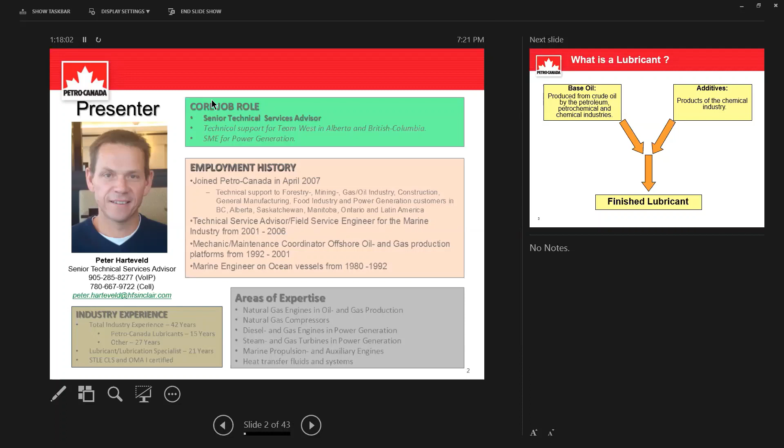So we start at the basics. What is a lubricant? Well, a lubricant is made out of a base oil and additives. We all know that, right?

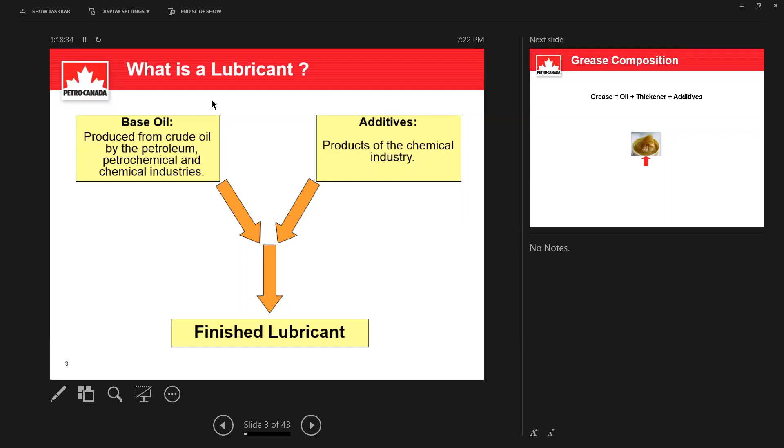Base oils are produced from crude oil by the petroleum industry, and then the petrochemical and chemical industries also produce base oils known as synthetics. The additives are products of the chemical industry, and together they form a finished lubricant.

So it's quite straightforward. In this presentation, I'm going to focus on lube oil, but because grease is also a lubricant, we're going to jump back and forth between lube oils and greases a little bit.

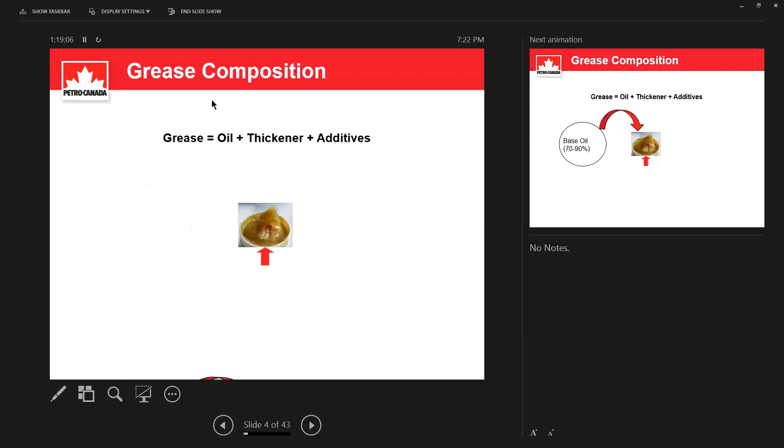So the grease composition actually has three components. In an oil, there is the oil and the additives, but in a grease there is a third one, the thickener, right? And you see that here. There's an amazing amount of base oil in grease, like 70 to 90%, and that's held by the thickener.

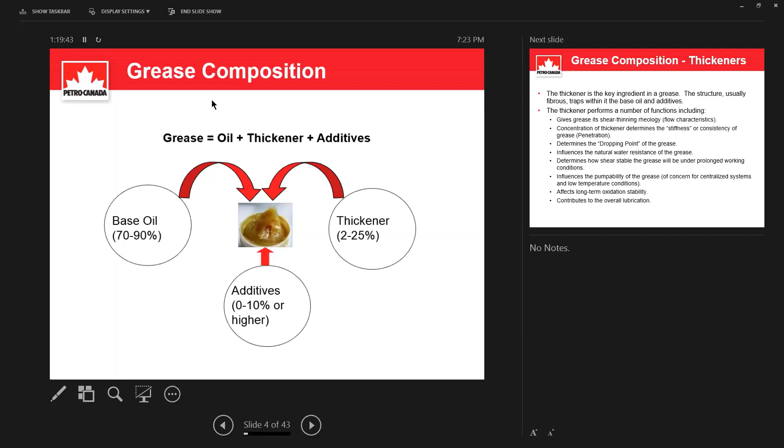You may have heard this comparison where they compare a sponge holding water to a thickener holding the base oil. So there's that much oil in a grease. Then in addition to that, depending on what type of grease it is, there is 2 to 25% thickener. And then there's additives, anywhere from 0 to 10%, depending on what kind of grease it is and what the application is for. So that is how a grease is made up.

To continue a little bit on thickener types and what kind of influence that has on the properties of a grease: the thickener is a key ingredient in a grease. And the structure, as it says here, is usually fibrous, but the fiber structure of thickeners varies. And like I said, it traps within it the base oil and the additives.

The thickener performs a number of functions, including what you see here at these bullet points. It gives the grease its shear thinning rheology, so the flow characteristics of the grease. The concentration of the thickener determines the stiffness, or the penetration, or the consistency of grease, which is measured in a cone penetration test.

It determines the dropping point of the grease. So the dropping point of the grease is a high temperature whereby that grease is no longer capable of resisting it, and then the whole compound falls apart.

The thickener also influences the water resistance of a grease, because certain greases, like calcium-based greases, are more water resistant than others, right?

It determines how shear stable the grease will be under prolonged working conditions, and how, as it thins out in its operation, some greases thin out, and how that returns to its original consistency after the machine is stopped, let's say.

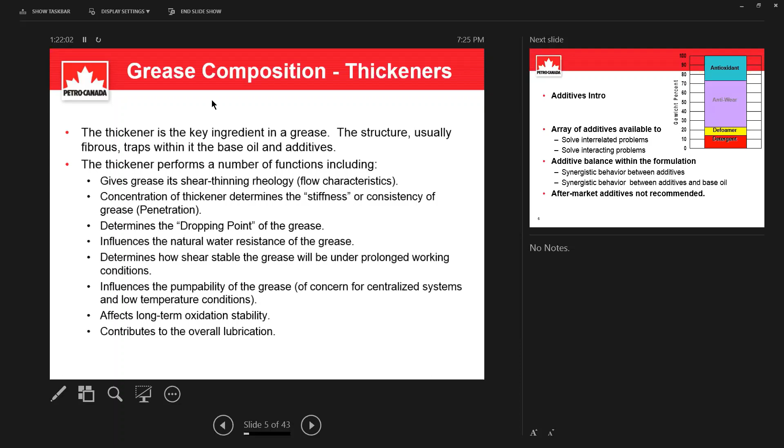Now we go back to additives in general. So there is an array of additives available to formulators, many different kinds. And these types are available because over time they've been developed to solve interrelated problems.

So interrelated problems means problems between the additives themselves—one product or one additive kind of hindering the performance of another additive. And they've also been developed to solve interacting problems between the base oil and the additive.

And that is known as a balance within the formulation. So the formulators strive to design a recipe, if you will, which is very balanced. And then they talk about synergistic behavior between the additives—so the additives should not fight with each other, they have to support each other—and a synergistic behavior between the base oil and the additives.

That balance within the formulation is the main reason why aftermarket additives are not recommended by us as an oil manufacturer. And I'm not saying that aftermarket additives are not good, because there are some high quality products on the market. But I'll tell you in the next slide why those should not be used.

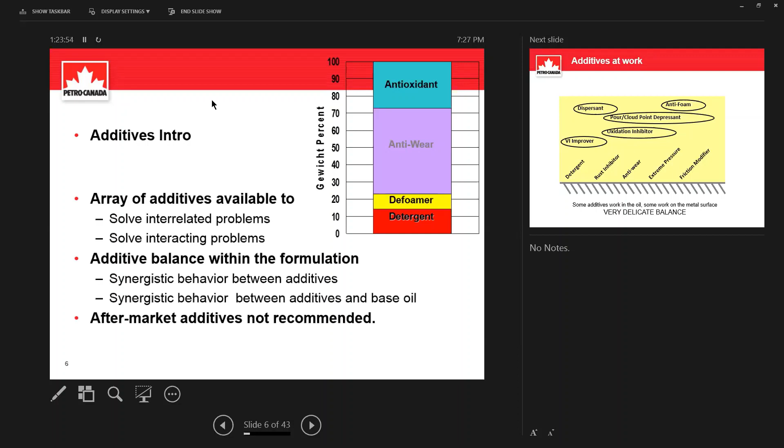Okay, so here, additives at work. This is a depiction of a metal surface inside a piece of equipment, can be anything, and a lube oil film. Within that system, some additives work in the oil and some additives work on the metal surface, so they are surface active. You see the examples of that over here.

Now we're going into the separate ones in the next couple of slides, really in detail. But I wanted to use this slide to explain to you why aftermarket additives are not recommended. Let's say that somebody buys an anti-wear additive compound to add to their finished lube oil formulation.

That will improve the wear protection of the product. However, if you put too much anti-wear in there, there will no longer be place on the metal surface for, for instance, a detergent. And if we talk about an engine, then the engine can become really dirty inside, because now the detergent doesn't work anymore. This is sort of a simplification of explaining it, but it's all related to the polarity of the molecules that try to find a place on the metal surface.

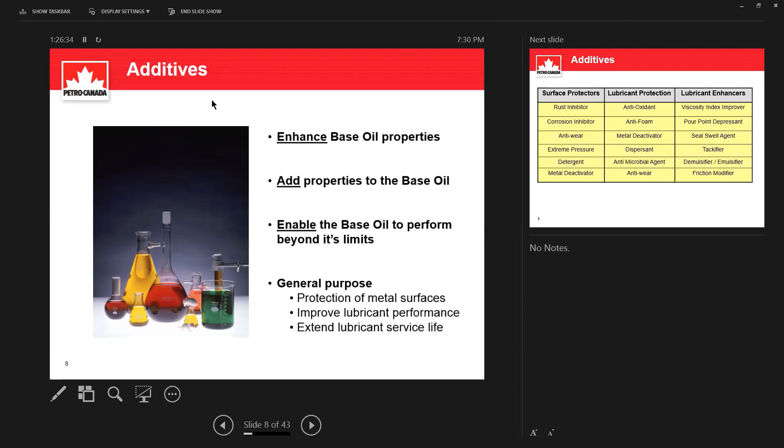Here is a table that shows an overview of the additives as they are categorized in surface protectors, lubricant protectors, and lubricant enhancers. We will go into most of these in detail during the presentation. I just wanted to pick out some that we probably see the most.

Like a detergent in an engine oil is there to maintain cleanliness, but also to neutralize acids that are formed during combustion. That is surface active, but it always works hand in hand with the dispersant. We'll come to that later.

The anti-wear, as the word says, is there to protect equipment from wear. But you can see that it's also a lubricant protector, because the anti-wear also acts as an antioxidant.

And then there are lubricant enhancers like viscosity index improvers. Those are molecules that are used to make a multi-grade oil. And tackifier is an additive that is used a lot in grease, and the word kind of speaks for itself. It makes that grease more tacky, sticky, adheres to metal surfaces better that way, makes it more resistant to water wash out, water spray off, that kind of thing.

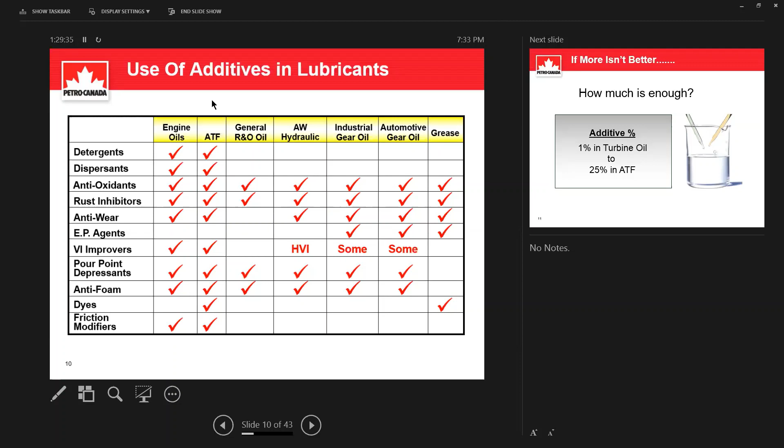Like a general R&O oil, a turbine oil, should have the least amount of additives as possible because it prevents formation of sludge in an operating turbine. So that's one example of that. So if more isn't better, how much is enough? 1% additive treat rate in a turbine oil and 25% in an ATF. You see how widespread that is, right? And it's done for a reason.

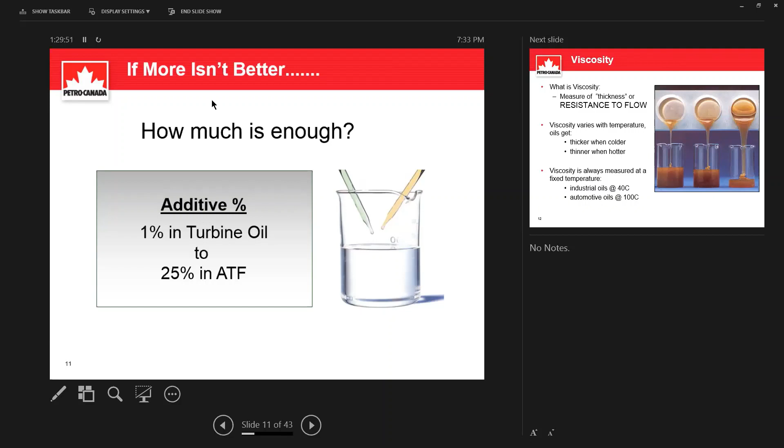Now let's talk for a minute about viscosity. We all know viscosity sitting here, that's kind of very basic. So viscosity is the most important property of a lube oil. And what is it? Measurement of thickness or resistance to flow.

You all know that viscosity gets thicker when the oil cools down and gets thinner when it gets hotter. But the reason I say this is because now we're going to have a look at viscosity index improvers, and how they influence viscosity in relation to temperature, and with that, how a multigrade oil is formulated.

Viscosity is always measured at a certain temperature. So for industrial oils at 40 degrees C - you probably all know that, like ISO VG 32, ISO VG 46, those are 32 and 46 centistokes at 40 degrees C, right? But if we look at automotive engine oils, according to SAE, they are specified at 100 degrees C. That's something to keep in mind when we go through the next slides.

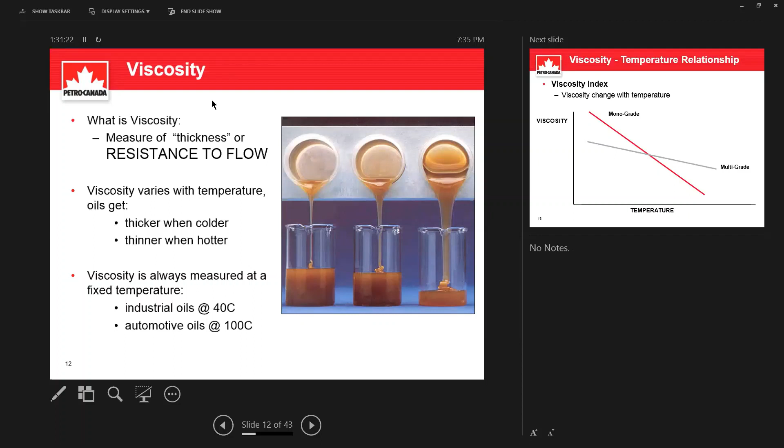Viscosity index. Here on this graph, we show the viscosity-temperature relationship between a monograde oil, which is the red line, and a multigrade oil, which is the gray line. It shows the viscosity change with temperature.

As you can see, when looking at the monograde oil, as it cools down, it starts to get really thick. But when it heats up, it becomes really thin. And that is not something that is desirable, because you want to have a viscosity-temperature relation that is quite flat, to give that particular oil a wider operating temperature range.

And that is what the multigrade oil does, because it becomes clear here from this graph that as it cools down, the viscosity is lower, and as it warms up, it doesn't thin out as much, right? You've got to keep in mind that the viscosity is directly related to the lube oil film thickness inside a bearing or between a piston ring and a liner. And that is why we want to keep this from dropping too much, because then the lube oil film becomes too thin and metal to metal contact starts.

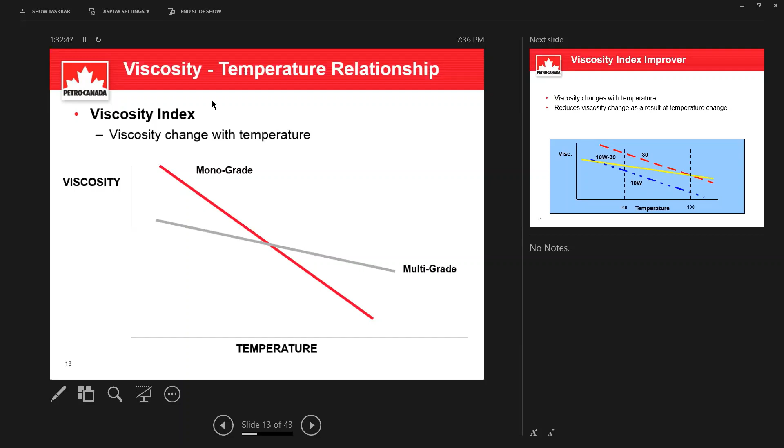Now, taking it to a little bit more of a specific level, let's have a look at a 10W30 engine oil. We already know that the viscosity changes with temperature, and the function of the viscosity index improver is to reduce the change in viscosity as a result of the temperature change. This 10W30 oil is made up of a 10W base oil with added VI improver, or viscosity index improvers.

As I said before, we're looking at an engine oil, so the viscosity is specified at 100 degrees C according to SAE. So this 10W30 oil, multigrade, is an SAE30 oil, right? But it's a multigrade, it's not a monograde. So being an SAE30, it has to have the same viscosity as the monograde SAE30 at 100 degrees C. And as you can see, it does.

So it's a 30. But if we go to the low temperature side of the graph here, you'll see that it doesn't thicken up as much as the SAE30 does. It stays thinner, which is good for low temperature startup, because if the oil is too thick, it takes some time for it to be pumped to the top of the engine to lubricate the camshafts or valve followers or whatever is there. And so the 10W30 is better at doing that.

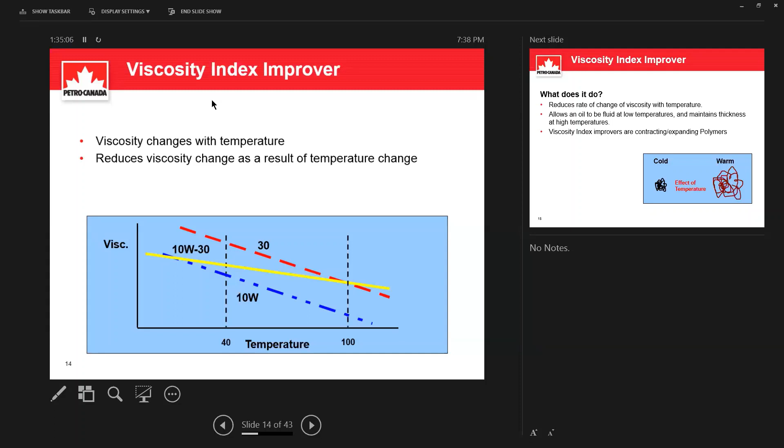So viscosity index improvers are molecules that are designed to reduce the rate of change of viscosity with temperature. So they allow an oil to be fluid at low temperatures and maintain thickness at high temperatures. They are molecules that have the ability to contract and expand, as you can see on this picture here. So when it's cold, they sort of ball up into a very small size. And when it's warm, they expand and become bigger.

The size of a molecule directly influences the viscosity of an oil. So by doing this, going from here to there or vice versa, it reduces the change of viscosity with a change in temperature. Is that kind of clear the way I explained it? So that's what it does.

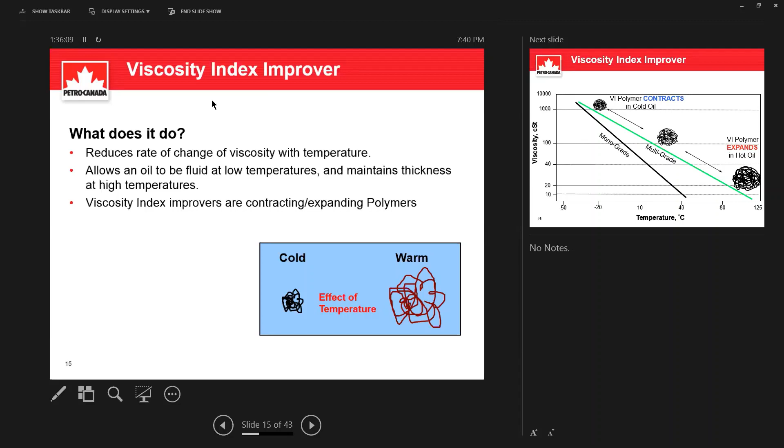And here you can see that depicted in another way. So the VI improver is a polymer. It contracts when it's cold, so by doing that it doesn't thicken up as much as the monograde. And when it heats up, it expands and it doesn't thin out as much as the monograde. So that's how that works.

Now, earlier on before dinner, some of us enjoyed a beverage. So my question to you is, how would that work with beer? I usually ask about water, but here we can talk about beer. So how do you think that works? If you look at this, how would beer or water react? Any idea?

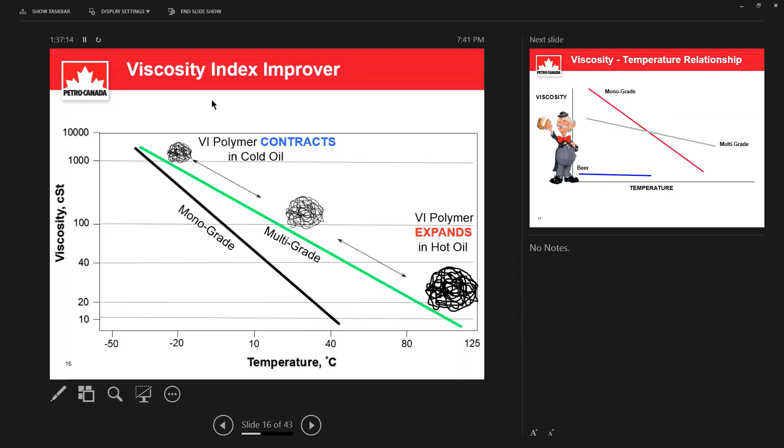No, it doesn't, just by itself. We're not talking about freezing or boiling. We're talking in between. It doesn't change — this is what it is, right? Very low viscosity like water, and it just has a flat line.

When you talk about VI, you look at typical data of lube oils and it's got a certain VI. A fluid like this has an extremely high VI. A fluid like this, with this large change, has a low VI, around 100. And those multi-grade oils have a VI of around 150 — this is kind of an example of what happens here. And there are hydraulic oils on the market that have a VI of around 400, so they have a very small rate of change with a change in temperature.

The taste will change, hey? The taste will change, yeah sure. Yeah, if you put that in, this is not nice anymore.

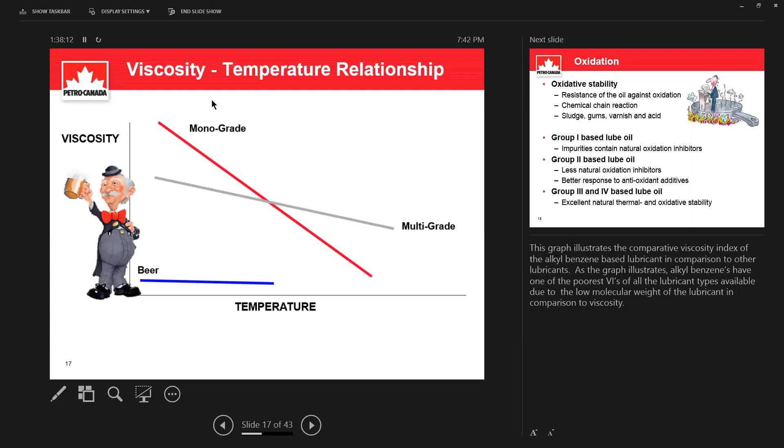All right, so those were viscosity index improvers. And if you have questions, just go ahead — you don't have to wait till the end.

So now we're going to have a look at oil life. Oil life is very often limited by oxidation, and that's why an oil has to have oxidative stability — the resistance of the oil against oxidation. Oxidation is a chemical chain reaction whereby sludge, varnish, gums, and acids are being formed. Viscosity goes up after a while, and it reduces the life of the oil.

Oxidation affects different types of lubricants differently, depending on the group of the base oil. So a Group 1 base oil, just because of the way it is manufactured — the refining process — is only capable of taking out a limited amount of impurities.

You'd say, well, that's negative, and it is, but there's also a positive side, because some of these impurities contain the natural oxidation inhibitors present in a Group 1 base oil. That gives a Group 1 base oil fairly decent oxidative stability, but not as good as a finished lubricant made of a Group 2 base oil. Because of the manufacturing process of a Group 2 base oil, the process is capable of removing more of those impurities. By doing that, it will take out more of those naturally occurring oxidation inhibitors.

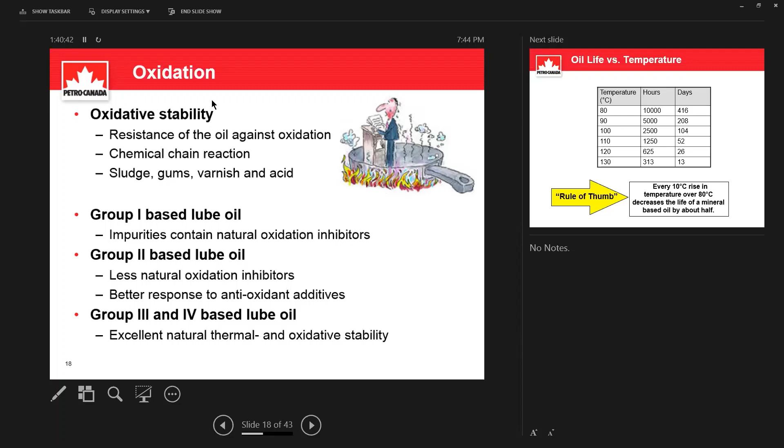There's a rule of thumb often used when we talk about oxidation and how it reduces the life of the oil: every 10 degrees Celsius rise over 80 degrees C, sometimes 70 degrees C is used, will reduce the life of the oil. For a mineral oil — since synthetics can react differently — the life is reduced by about half. So you run a mineral oil at 80 degrees C and it lasts 10,000 hours; that same oil in that same equipment will only last about 5,000 hours if the temperature goes up to 90 degrees C. So that's all part of oxidation, because oxidation is very much influenced by temperature.

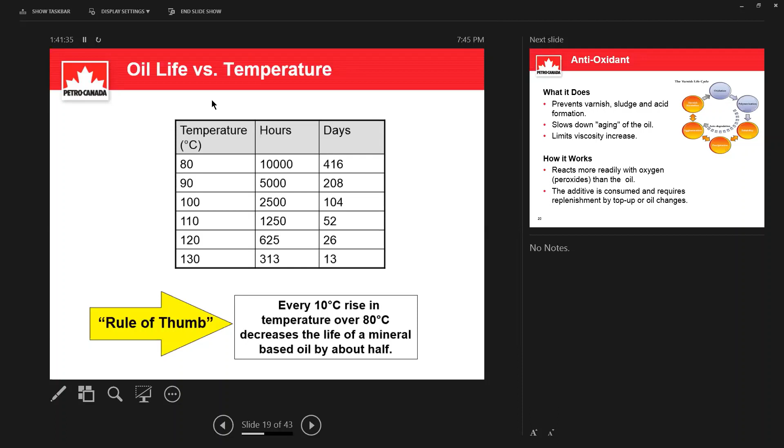So for that reason, formulators add an antioxidant to the base oil. What does it do? It prevents varnish, sludge, and acid formation, and it slows down the aging of the oil.

It limits viscosity increase because over time, oxidation will cause the oil to become thicker, dark, and smelly, but by then it's in a far progressed state. It does that by reacting more readily with oxygen out of the air than the base oil does. There's a chain reaction that involves peroxides, which speed up at an accelerated pace, and once it starts oxidizing, it goes faster and faster.

The antioxidant additive sacrifices itself, so it's consumed, and it requires replenishment by top-up. In large systems we sometimes sweeten, while in smaller systems we do oil changes. In a small system, the oil is at the end of its life, you're not going to sweeten it, you're going to change the oil.

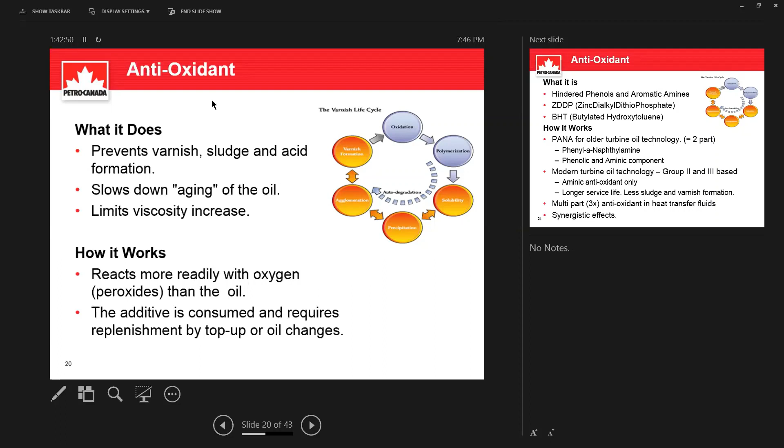Now we're going to the chemical stuff. So there's hindered phenols, aromatic amines, ZDDP, zinc dialkyl dithiophosphate, which is actually an anti-wear additive but also acts as a secondary antioxidant in formulations. Then there is BHT, butylated hydroxytoluene, but I think there are more that I just don't know. An example I'd like to use is something I found recently.

We're talking about turbine oils here. Historically, turbine oils were formulated with a dual antioxidant combination called PANA, a two-part antioxidant. PANA stands for phenyl alpha naphthylamine, and it contains a phenolic and an aminic compound. The nice thing about that is the aminic compound depletes slower because there's a regeneration process within that package, where the phenolic antioxidant regenerates the aminic antioxidant. That has always been thought to be the top of turbine oil formulations, giving that oil a long life.

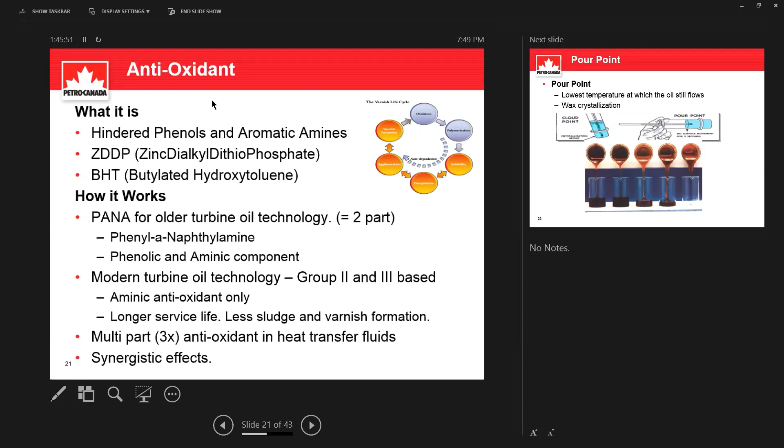Okay, pour point. Very, very important, especially here in northern Canada in the wintertime. We want to make sure we get customers oils that have low temperature fluidity. So then we look at the pour point, which is the lowest temperature at which the oil will still flow. Just before the pour point sets in at a certain temperature, we talk about the cloud point.

You can actually see that because the oil goes from bright and transparent, although it could be an amber type color, to becoming somewhat hazy. Most oils are made with paraffinic base oils, and depending on the production process, they contain a certain amount of paraffinic wax. At low temperatures, that paraffinic wax starts to crystallize, and those crystals grow bigger and start sort of holding each other, forming a web of crystals that eventually turns the oil into a solid.

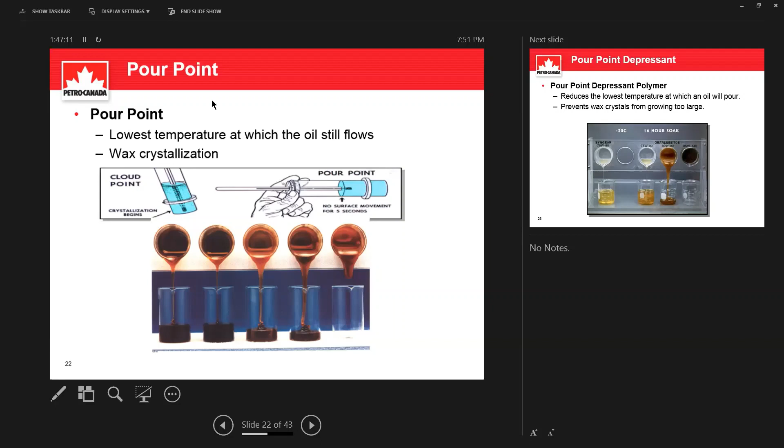So the formulators use a pour point depressant polymer to reduce the lowest temperature at which an oil will pour. That's pour point depressants, often abbreviated as PPD, and what it does is prevent those wax crystals from growing too large. Of course there's a limit to that, but that's how that works.

Now, I guess you all know what PAOs are - group 4 base oils, polyalpha olefins. That's a man-made molecule, still a hydrocarbon, but there's no paraffinic wax in there. That's why those PAO products are often found in products that have very low pour points, like -50, -60.

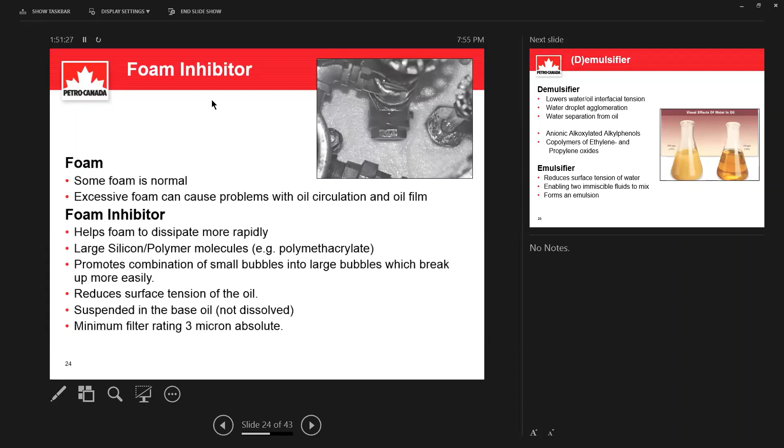The other thing I would like to say about foam is that foam problems are very often confused with air release problems, because air release is something different, but it shows up in kind of the same way as a lot of foam. And so yeah, that's one thing. What was the other thing? That's it, go to the next slide.

Demulsifiers and emulsifiers. So some oils will be formulated to demulsify, which means to readily separate from water, and other oils are formulated to emulsify, so to make an emulsion.

An example of an oil that demulsifies is an industrial gear oil. In an industrial gear oil, we want to make sure that any water that gets in there readily separates from the oil, and then because of the density being higher than that of the oil, the water will sink to the bottom of the gearbox, settle out, and then the end user or the operators and mechanics can drain off that water from the bottom of the gearbox.

So the demulsifier lowers the water-oil interfacial tension, which promotes water droplet agglomeration and water separation from the oil. They are anionic alkoxylated alkylphenols and copolymers of ethylene and propylene oxides.

Now, emulsifiers - that is the opposite. The formulation purposely aims to create an emulsion, and it does that by reducing the surface tension of the water to enable two immiscible fluids to mix. So the water and the oil will then mix to form an emulsion.

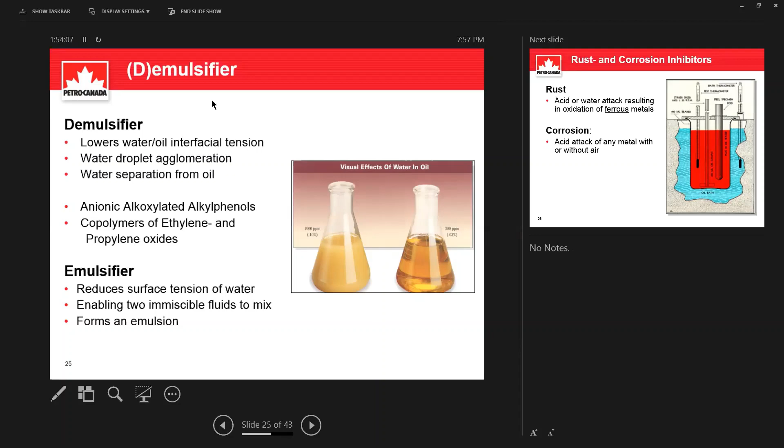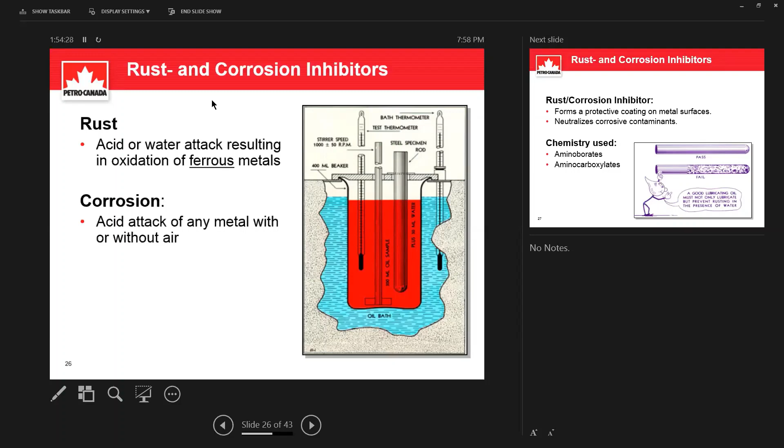Now, rust and corrosion inhibitors are other additives that are used, to prevent rust formation, which is an acid or water attack resulting in the oxidation of ferrous metals, or corrosion, which is an acid attack of any metal with or without air. So formulators add rust and corrosion inhibitors to their oils. What it does is form a protective coating on metal surfaces, and others neutralize corrosive contaminants. The chemistries used are aminoborates and aminocarboxylates.

And then there are tests that make use of metal rods. The rods are submerged in the oil, and after a certain period of time, if it shows up like this, it's not good - it doesn't offer enough protection.

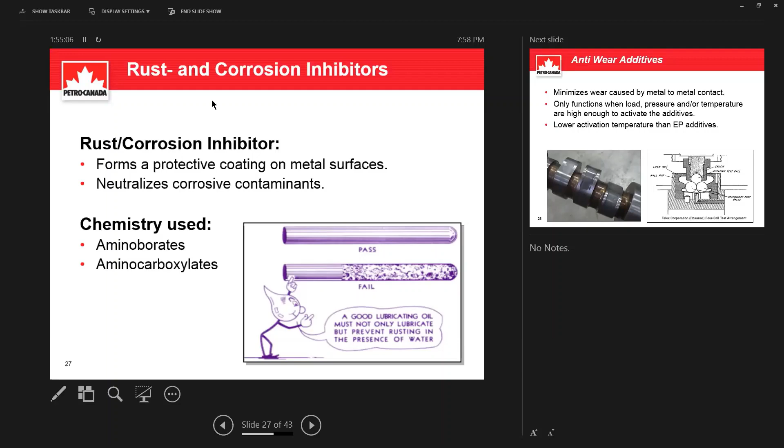Anti-wear minimizes wear caused by metal-to-metal contact. It functions when the load, the pressure, and the temperature are high enough to activate the additives, but this happens at a lower activation temperature than EP additives. So anti-wear is like step one, and then if an oil is formulated with EP, that offers more protection.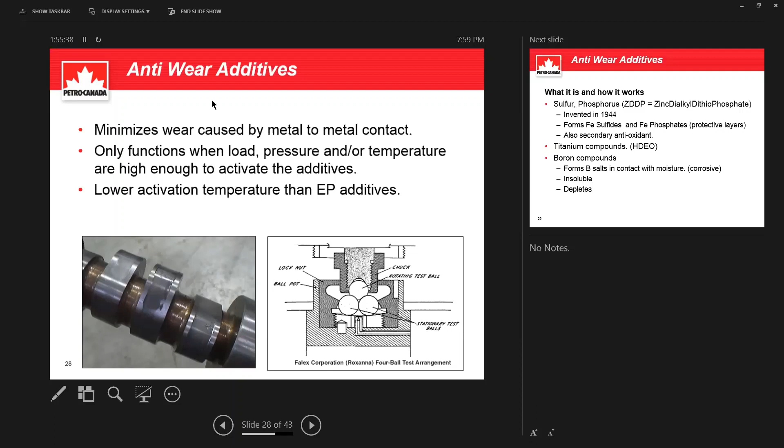This is actually really interesting because the ZDDP was invented during the Second World War, and it still is the most common, and I think the better working anti-wear additive on the market. So you can see how many years ago it was, 1944. It forms iron sulfides and iron phosphates on the metal surfaces as protective layers, and it also acts as a secondary antioxidant.

Now, in more recent years, in heavy-duty diesel engine oils from a lube oil manufacturer in the US, they've introduced a product that contains a titanium compound.

I don't have a technical answer for you on how or why, and there's only a few specific places within a diesel engine, or certain engine designs, where they find that titanium provides added benefit. Like they used to talk about it, especially with old flat tappet design engines, where it would provide an extra layer of protection.

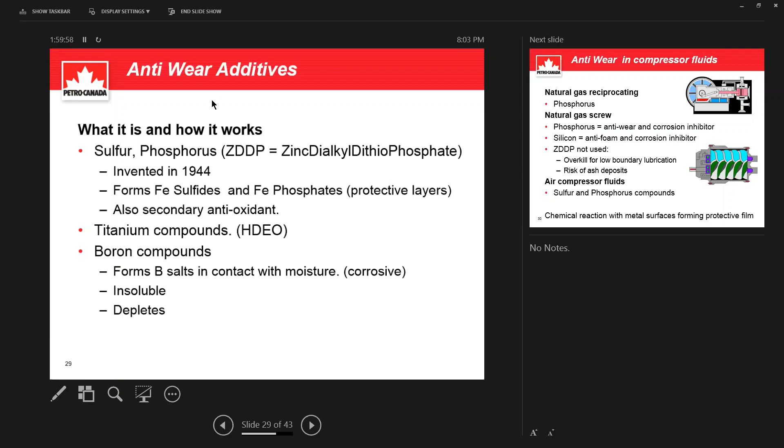In natural gas reciprocating cylinders, phosphorus is used as the anti-wear compound. For natural gas screw compressors, phosphorus is used as an anti-wear and corrosion inhibitor, and silicon is used as an anti-foam agent and corrosion inhibitor.

ZDDP is not used because it's seen as overkill for low boundary lubrication, and there's a risk of ash deposits since you try to keep this as clean as possible.

Air compressor fluids use sulfur and phosphorus compounds, and it's all based on chemical reaction with metal surfaces that form protective films.

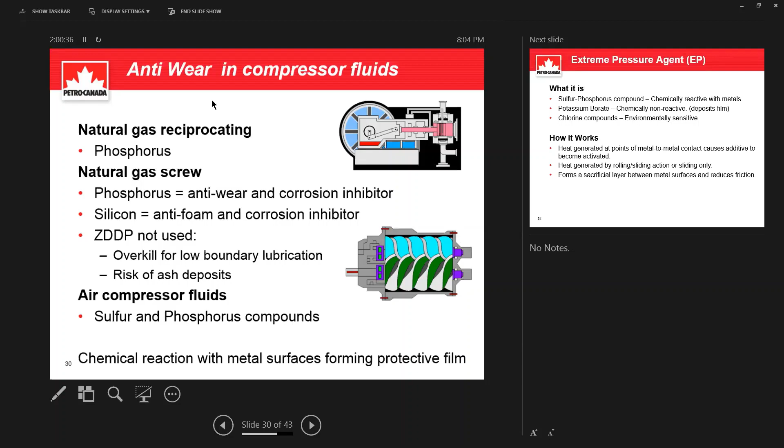Extreme pressure, or EP - the most common are sulfur phosphorus compounds, which are chemically reactive with metals. Then there are products, I think Chevron has one, a gear oil that contains potassium borate. These are chemically non-reactive, they just deposit a film.

In the past, a lot of chlorine was used, but chlorine is not used anymore nowadays because it's environmentally unfriendly or sensitive, so we don't use that.

So how that works: it is activated by heat generated at the points of metal to metal contact, and that's where these protective layers form under that pressure and heat, generated by rolling and sliding action, or sliding only.

It forms a sacrificial layer between the metal surfaces and reduces friction that way. It happens at really high temperatures, above 180 degrees C, but that's in the lube oil film - it has nothing to do with the lube oil temperature in the bath, or even the lube oil temperature as it goes through the bearings. It's in the film, and the contact temperature must reach that activation temperature, because if it doesn't, it won't work.

For that, there are solid lubricants that can be used, like molybdenum disulfide, graphite, tungsten disulfide. But those are difficult - they can't be dissolved in the base oil. So in greases it works better, but not so much in lube oil, or not as well as in grease.

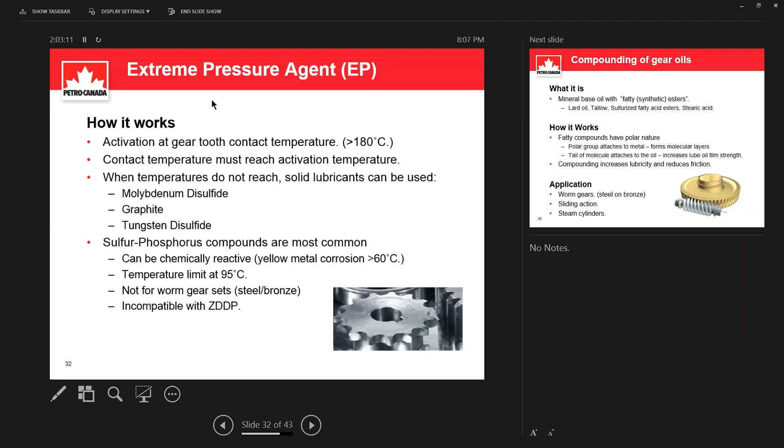There is another way of formulating gear oils. We look more at an old-fashioned way of formulating gear oils, mainly for worm gears, for the steel on bronze gear sets. That is called compounding, and compounding is the addition of, in the old days, lard oil and tallow.

This increases the polarity of the lube oil, and with increasing polarity, the intent is that the polar compound will stick to the metal better and it forms a much stronger lube oil film.

Nowadays, that is synthesized. There are still compounded products on the market, but it's not animal fat that goes in there anymore - it's a synthesized product. So the fatty compounds, like the synthesized animal products, have a polar nature, and the polar group attaches to the metal, forming a molecular layer that is thicker and stronger.

So it increases lubricity and reduces friction that way. Applications are for worm gears - steel on bronze, sliding action - and steam cylinders.

Steam cylinders aren't used much anymore, but because there is so much water and high temperature there, you want to make sure you end up with a lube oil film on the cylinder wall that has a lot of resistance against getting washed off by steam and water at high temperature.

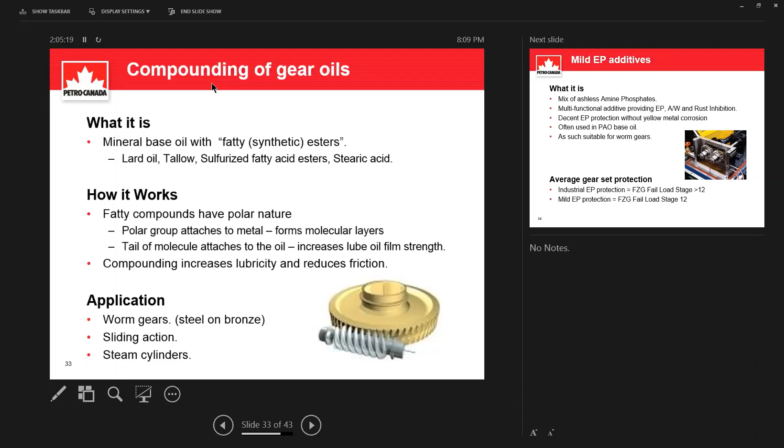But there is something else that has been formulated for that, and that is this: gear oils with a mild EP additive. So instead of an industrial EP additive based on sulfur phosphorus compounds, there's a mild EP gear oil, which is a blend of ashless amine phosphates.

You'll see those products in multifunctional products. A very common one is Mobil SHC 600 series - like in the Petro-Canada line, Synduro SHB, it's kind of the same thing. Those are mild EP gear oils that offer decent EP protection without the yellow metal corrosion. They are often used in PAO base oils, and as such, not having the problem of yellow metal corrosion and having the PAO, which forms a very strong lube oil film, it can be used in worm gears.

And when you look at the gear protection that it offers, it's a little bit lower than in the industrial gear oil. So this picture shows a laboratory test where gear oils are tested in a gear set. What they do is measure the failure load stage, the stage where the oil is no longer capable of preventing metal-to-metal contact between those two gear flanks of those two gears, as you can see here.

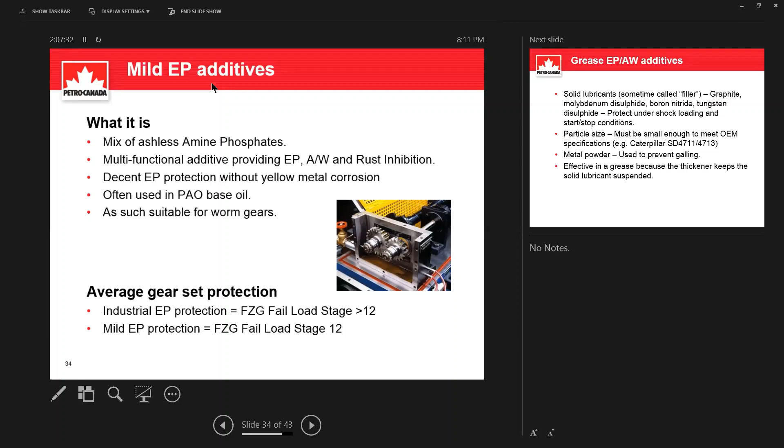Now let's make a little sidestep to grease. We always also use EP and anti-wear additives, and they are mostly solid lubricants, also known as fillers - graphite, molybdenum disulfide, boron nitride, tungsten disulfide. These solid lubricants have the capability to protect from metal-to-metal contact under shock loading conditions and under conditions where there's a lot of vibration, start-stop conditions, where a lube oil film has not yet been established.

This particle size thing is according to an OEM specification. Here's an example from Caterpillar that's used in mining shovels, where they use a lot of these fillers in the greases.

Metal powders are also used, like for threaded connections such as drill pipe. Then we use aluminum, copper, that kind of thing, to prevent galling of the threads. And in a grease it is more effective and easier to do than in a lube oil, because the thickener keeps the solid lubricant suspended.

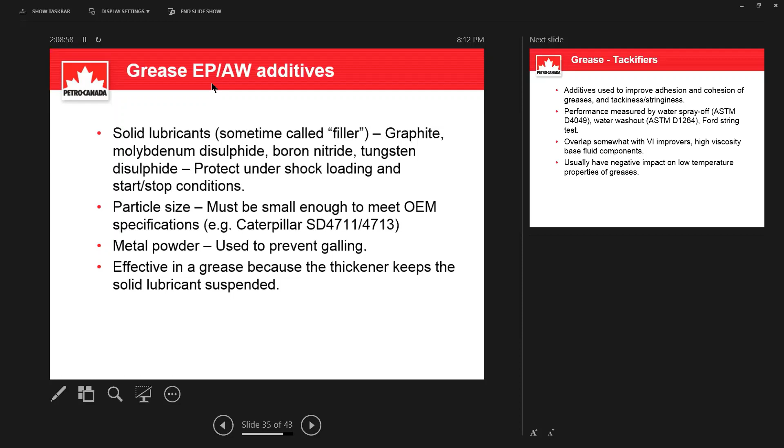Now we were talking about greases, so we go to the next one, which is a tackifier in grease. Tackifiers are additives to improve adhesion and cohesion of greases, and tackiness and stringiness. One of the things that's actually a laboratory test, but you can do it yourself too - you put your fingers in grease, then spread them out and look at how long that string becomes before it breaks.

That gives you an idea of the tackiness of a grease and the way it adheres to metal surfaces. Very often it also gives you a good indication of the water resistance of a grease, because if it sticks to metal very well, it's very difficult to wash it off with water. That type of performance is measured according to ASTM test methods: a water spray-off test, a water washout test, and a Ford string test.

Calcium greases are the most water resistant, and then the more modern ones like the calcium sulfonate carbonate type thickeners are really good at that too.

These tackifiers overlap somewhat with VI improvers, which are high viscosity base fluid components. But the negative impact of tackifiers on the grease is on its low temperature properties - the more tackifier that's in there, the less mobile a grease becomes. That becomes a bit of a challenge for a formulator, because if a formulator needs to formulate a grease that is really water resistant and really sticks to metal well, and wants to use a tackifier, then the minimum operating temperature of that grease is going to be not too low.

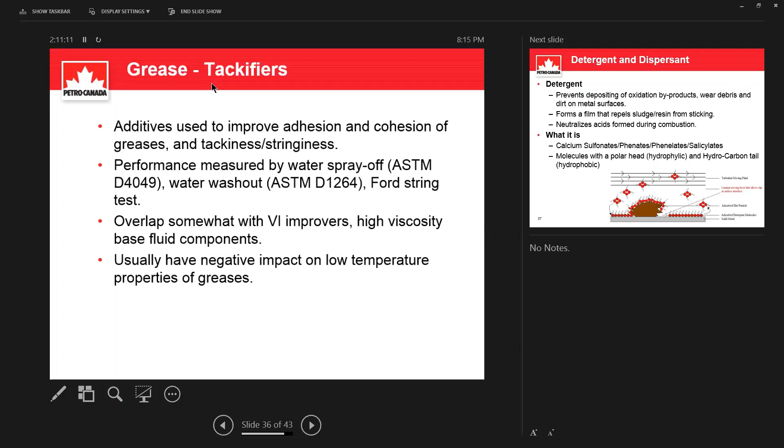Detergent and dispersant - so here we go back to engine oils. The detergent and the dispersant work hand in hand, so we'll start with the detergent. First, one thing to clarify: the name detergent could give you the impression that if you use an oil with a lot of detergent, it's going to clean up your completely foul engine. It doesn't work like that.

There are high mileage oils on the market that contain a bit more detergent and have the capability for a little more cleaning. But the detergent in a lube oil is not like the detergent you put on your hands to wash the dirt off. The detergent is there to maintain cleanliness - to start clean and prevent it from becoming dirty. That's the difference. So it prevents depositing of oxidation byproducts, wear debris, and dirt on metal surfaces.

And it does so by forming a film that repels the sludge resin from sticking. The other function of the detergent is that it neutralizes acids that are formed during combustion.

So here we talk about alkaline oils. And the easiest way to identify that is by looking at typical data of an oil and seeing if that oil has a base number or not.

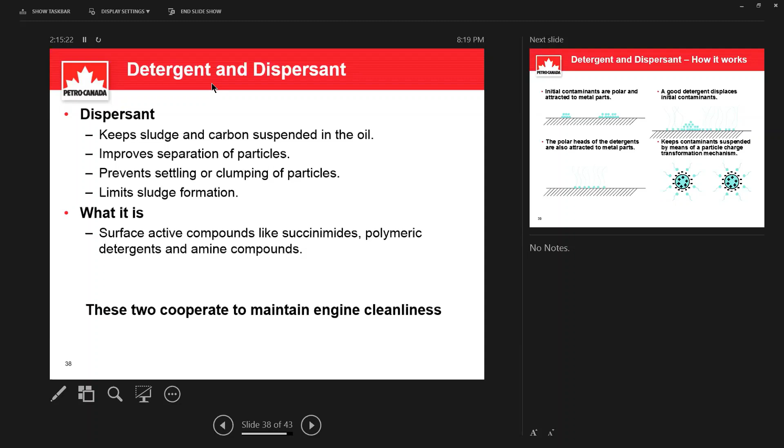It limits sludge formation, and it is a surface active compound known as succinimides, polymeric detergent, and amine compounds. These two cooperate to maintain engine cleanliness. And there is another drawing that I have here.

I know they use, I didn't make this, I actually stole it. But they use light blue, so it's a little bit hard to see those tails. But so the initial contaminants are here.

They are polar, and they are attracted to metal parts, so they like to stick to metal surfaces like bearings and whatever you have in equipment. Then the polar heads of the detergents are also attracted to the metal. And a good detergent displaces those initial contaminants, with emphasis on initial.

And it keeps those contaminants, and then the dispersant keeps those contaminants suspended by means of a particle charge transformation mechanism, as it's called. I didn't invent that, but that is what it's called.

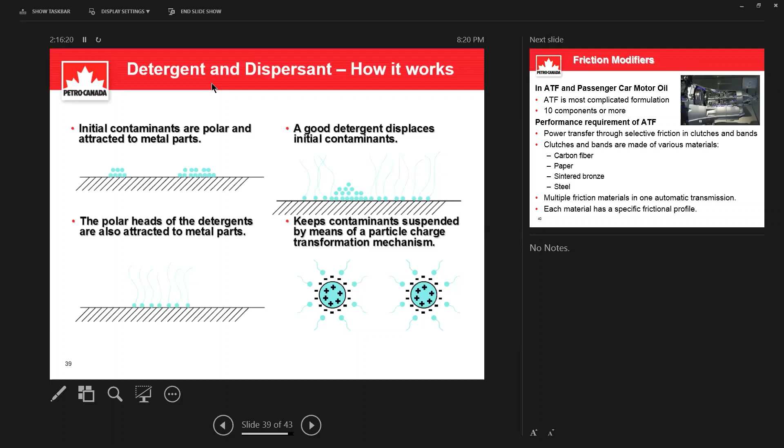Okay, the next one, friction modifiers. So here we're looking at automatic transmission fluids and passenger car motor oils. In one of the earliest slides, we've seen that an ATF is the most complicated formulation, right? Because it has 10 components or more. So you can imagine how important that synergy becomes between those different additives.

So what that needs to do, it needs to lubricate, but also transfer power through selective friction in clutches and bands. And those clutches and bands in automatic transmissions are made of a lot of different materials: carbon fiber, paper, sintered bronze, steel, you name it. So there are multiple friction materials in one automatic transmission. And that's what makes it so difficult, because each of those materials has a specific frictional profile.

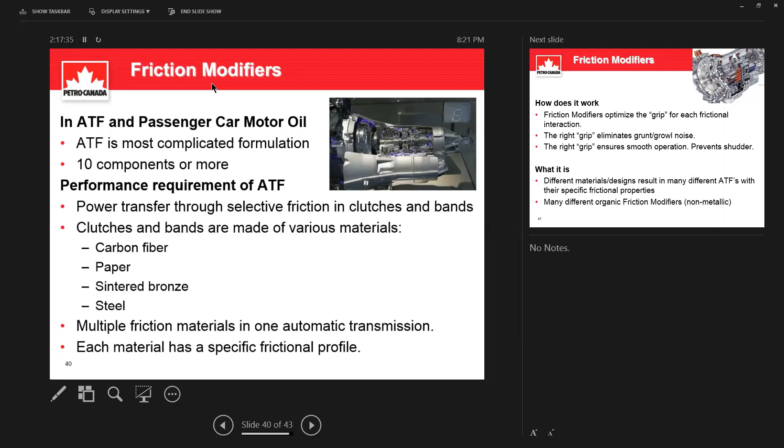And the lube oil, the ATF, has to be able to handle that. And the way it handles that is by optimizing the grip for each frictional interaction - there are a lot of clutches in an automatic transmission. And if it optimizes that grip, it eliminates unwanted noises like grunt and growl, as it's known in automatic transmission. And the right grip ensures smooth transitions between gears to prevent shudder.

Last year I was involved in a field trial with a new product on city buses with Allison transmissions. I'm not a specialist in automatic transmissions, but the people who work with them and do the maintenance have a very good insight into those.

They can really tell whether the frictional properties of an oil will last, because that's the thing—the frictional properties have to last at a constant level. If it degrades, it starts to make noise, and it becomes uncomfortable for passengers because the bus switches from one gear to another abruptly. That is what the automatic transmission fluid does.

That's why all these different materials and designs result in many different ATFs with specific frictional properties, and why there are so many on the market. In recent years, multi-vehicle ATFs have been developed, and people think they can use them in anything. But that's not true—a multi-vehicle ATF is still not suitable for just any type of transmission. We have two multi-vehicle fluids in our product line, and the differences are not only frictional properties but also viscosity, since modern designs require very low viscosities for fuel economy.

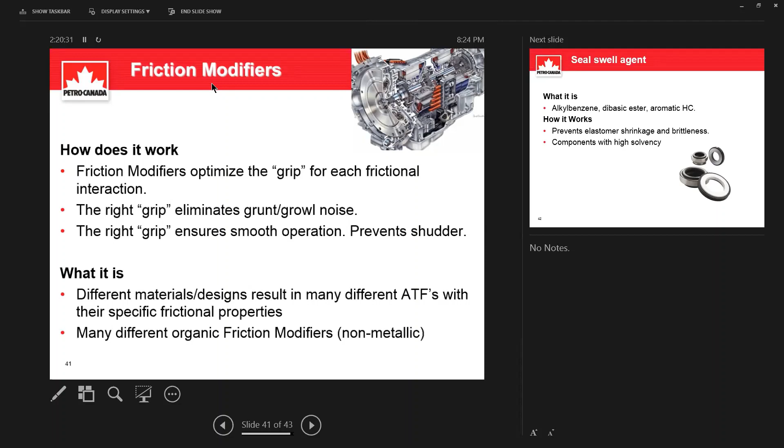Because there is so much different material, there are also a lot of different friction modifiers. I thought to just name them—many different organic friction modifiers, non-metallic in nature, without mentioning specifics. I think the last one is a seal swell agent.

Hydrocarbon base oils are non-polar in nature, and PAOs are even more non-polar. The purer these oils become, the lower the polarity, and the more they cause shrinkage, brittleness, and hardening of certain elastomers that make up the shaft seals. So formulators use seal swell agents added to the base oil to ensure seals don't shrink or harden, so they keep the oil inside and don't leak. There are components with high solvency—alkyl benzenes, dibasic esters, aromatic hydrocarbons—aromatic compounds used in those seal swell agents.